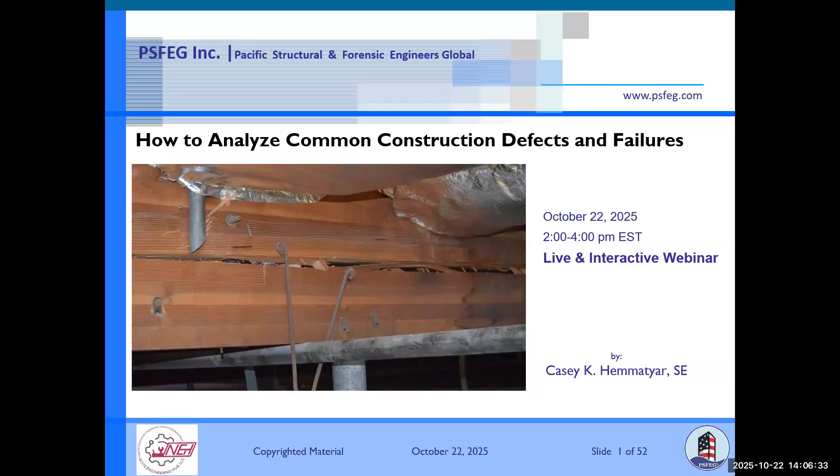I've been a licensed structural civil engineer for over 40 years. I have investigated tens of thousands of structures, from NASA to hospitals, universities, celebrity homes, and so forth throughout North America. I also perform as a forensic expert witness, and I have been designated as an expert witness in about 200 litigation matters throughout North America.

I provide these lectures as continuing education for engineers and architects, so I can assist my colleagues in improving their knowledge in this field, serving the communities in a more meaningful manner. That's it, okay, let's go to the next slide.

So I'm going to share with you my experience through this webinar with the following five topics: building's general structural engineering issues, foundation system issues, structural framing members, patent and latent construction defects, and exploring deficiencies and failures in the structures.

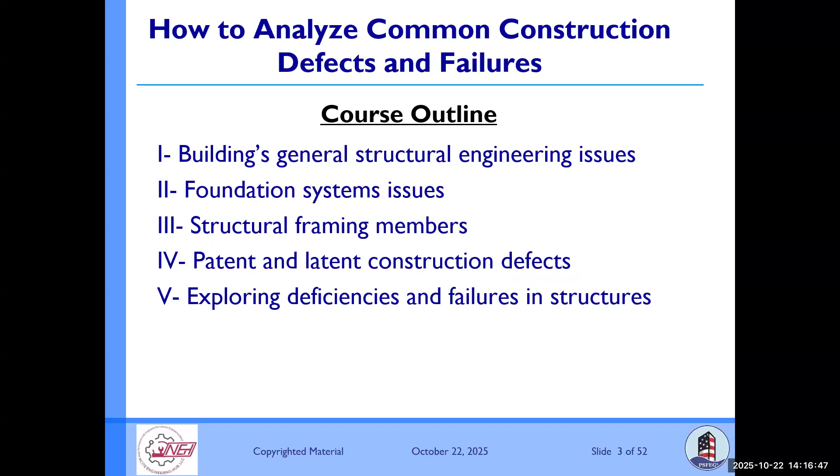Okay, so from the back in this third slide, we review this. Now we go to the foundation system issues. We're breaking down the overall structural issues: item number one is the foundation, and then we go to the superstructure or framing. So now we're going to review the foundation issues.

That comes down to four subcategories: foundation system failure, soil movement or displacement, geotechnical engineering evaluation, and structural engineering design.

I talked about the manometer survey as a non-destructive testing method on the previous slide. This assists us in the verification of the foundation. Obviously, it also assists in verifying the framing system on the upper levels, other than the first level on the foundation—but this slide is focusing on the foundation.

For those of us not very familiar with the manometer survey concept, I'll explain it briefly. Essentially, you bring an instrument to the building and check the topography of the floor. You find out which areas are low and which are high, and draw that on a plan—just like a topography map for a field—showing which areas are high, low, shifting, or tilting. That's what we call a manometer survey.

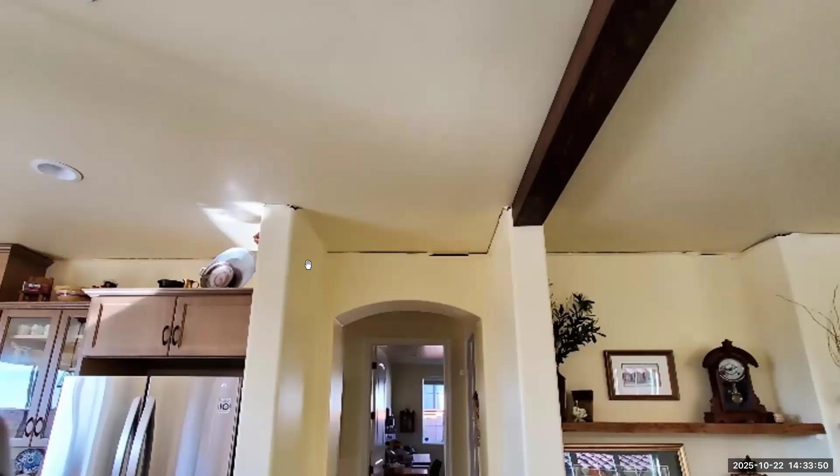You see what's going on here. If I can zoom in, you see the big separation, like a 1 inch separation here, and here, in the middle of the house. You see this separation. Why do we have this separation here? I explained to you why.

Because of the heave and expansion, it went up. Look what happened here. When the perimeter goes up, the truss bottom chord stays on the perimeter wall and is level, but the bottom keeps everything, all the walls in the same place. That's why you have these displacements in the middle. You see the gap.

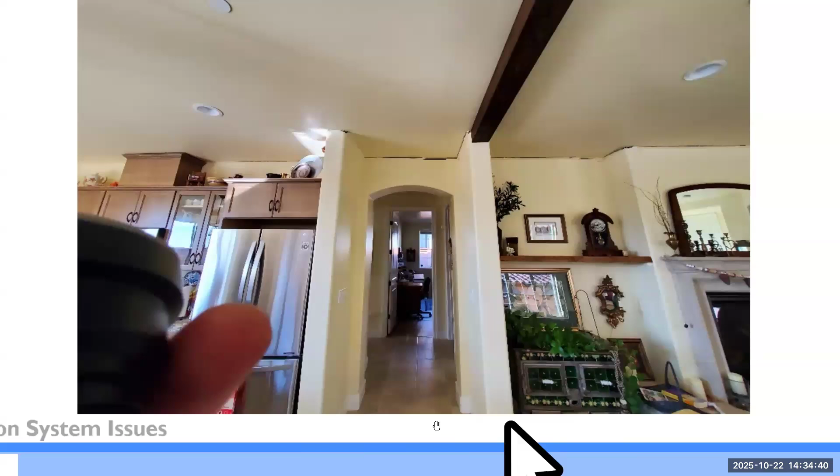So we go back here. This is that center. The walls are anchored to that and supported on the slab. They're down, but the roof trusses go up just because of the way it's displaced here. They're up because their ends went up. So that's how...

When you have improper treatment of the foundation, the soil, improper treatment of the soil, and not following the exact recommendation of the soil engineer, that's why this problem happened. If they did follow the exact recommendation of the geotechnical engineer, we would not have had this. Why? Because the soil below this was removed. They were importing gravel or sandy material, whatever was recommended by the geotechnical engineer, which would not experience volumetric changes because of the rain.

So let's go through the other photographs. These are some close-up pictures that we can see. More cracks here, more separation. And this right now is probably a $1.5 million home. It's not that the owners didn't pay a lot of money. They paid a lot of money, and these kinds of cracks are unacceptable.

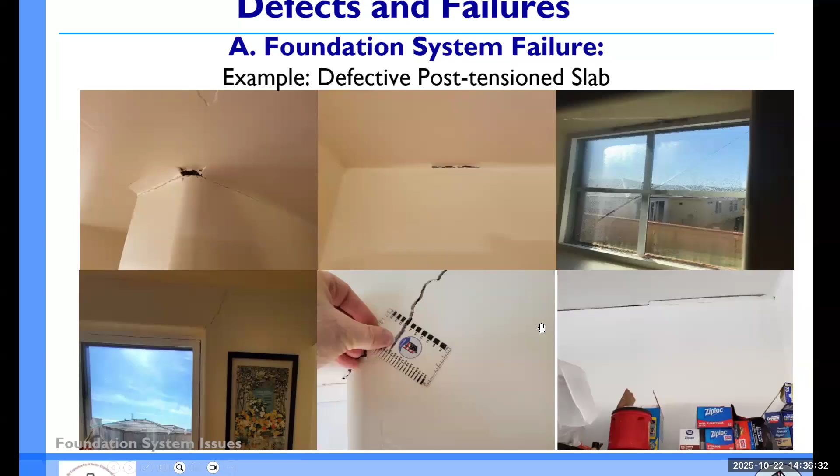This crack here that you can see is on the sliding door in the back of the house. It's a huge crack. You don't expect this in a 1-year-old home that cost $1 million when they bought it, with this kind of separation.

So we go to the next slide. I just shared with you some of these, and look here, the window at the back of the house - this glazing cracked because of the displacement, which forced the glazing to crack.

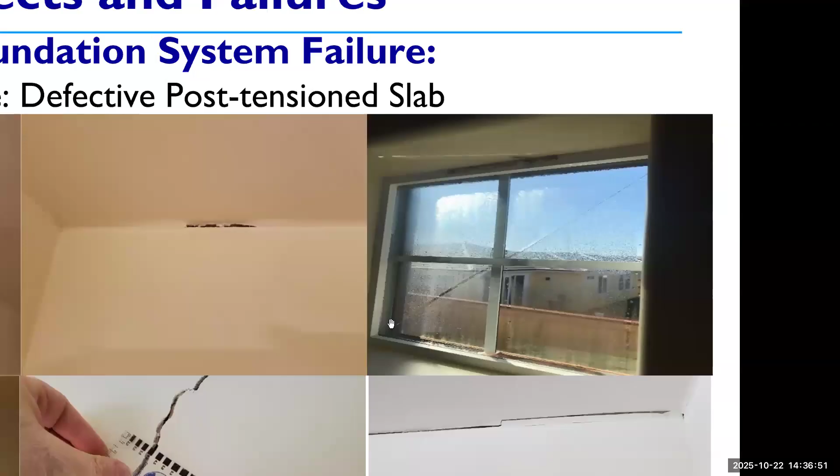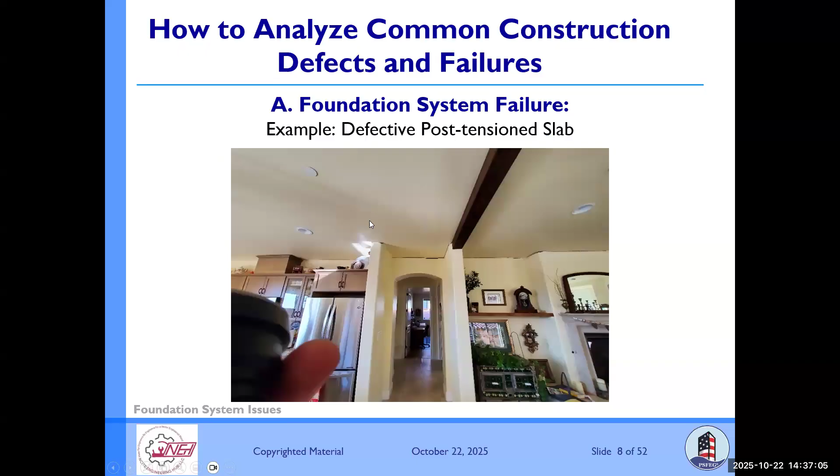Now, the next slide, we are talking about the soil movement. So far we were back in the slide, so you have some objective of what's going on. We were talking about foundation system failure. Now we're going to go to soil movement. So we go back to this slide, the soil movement that we're talking about.

Just going over this concept: when the soil exhibits volumetric changes, more specifically clay soils - the clay soil, generally, this is showing, when you have a new construction, once you have rain coming in, it impacts the perimeter of the building, not the center of the building. So the swelling occurs, or that heaving phenomena occurs, and pushes up the slabs upward.

The center of the slab stays the same, doesn't go down, it just stays in the same place. And you have this differential elevation that, in this case that we were doing, because we did floor elevation difference, it was like about 2 inches or inch and a half. And if you recall in the earlier slide, I mentioned about...

I mentioned about angular distortion. The angular distortion was way below acceptable level. I don't recall the exact dimensions and numbers, but I believe it was like 2 inches over a 20 foot span. If you calculate that, it's way below - I don't know off the top of my head, maybe 1/120, which versus 1/360 is way below.

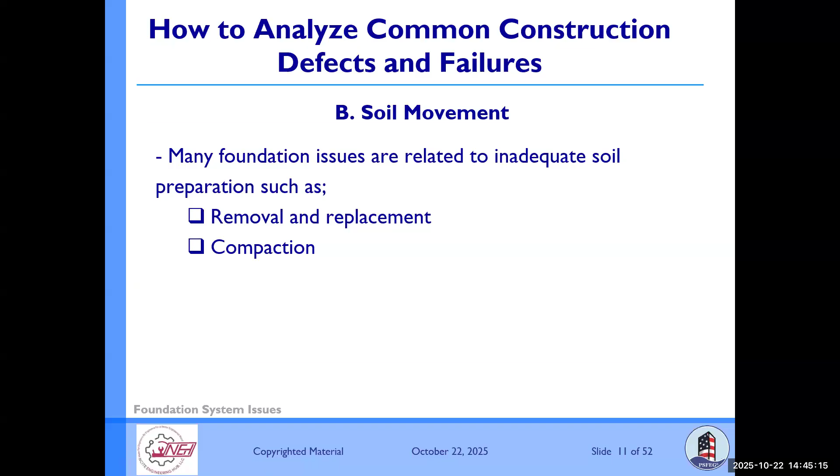So I just wanted to share with you that, thank God, the great majority of our engineers, their work, their reports, whether structural or geotechnical, are great. And if they're implemented, there's no problem. But there are some cases, unfortunately probably less than 5%, where the work product of the design engineer is not the best and can cause problems. Anyways, so going back to this, I just explained.

And now we go to geotechnical. If you recall, back in slide 5, we're on slide 13. Back in slide 5, I mentioned to you about these. This is slide 5. Now we're on the third item, geotechnical. Okay, now.

Geotechnical engineering evaluation, as I stated regarding that NASA scientist's home, is sometimes associated with foundation issues. The structural engineer does his job properly, but the geotechnical assumptions and recommendations were flawed, and that causes a problem. So in general, when the structure doesn't perform properly due to poor performance of the foundation, you can have three factors: either the geotechnical engineer was flawed, or the geotechnical engineer was fine but the structural engineer's design was flawed causing the foundation problems, or both engineers did their job properly but the general contractor didn't do the job properly and constructed it different than what was in the design.

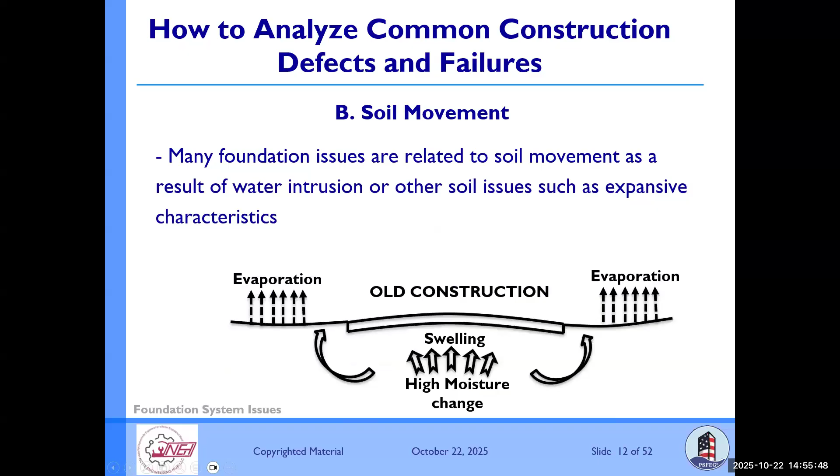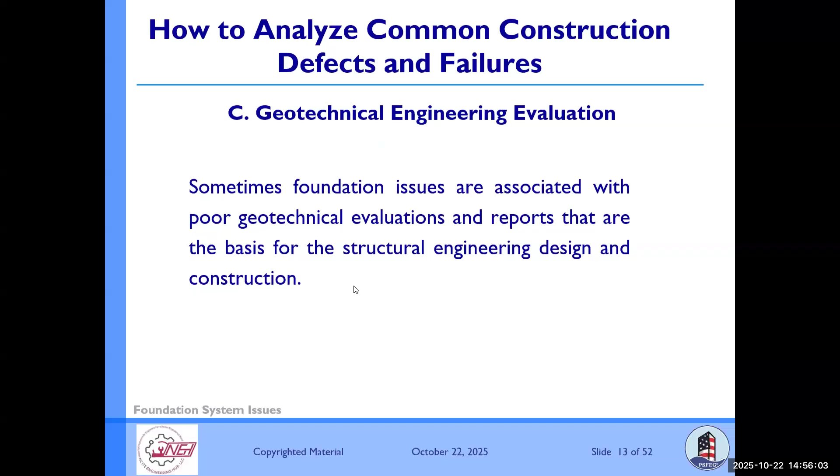Okay, now we were talking about this slide. Now we're continuing - let's go back. Structural engineering design, that was under the category - okay, under foundation system, A, B, C, D. Now we go back to the slide. Now we are at D, I explained that. Now we are on structural framing members. This should say 3, I apologize - it should say number 3 because number 2 was foundation, number 1 was general. So here the subcategories are: defective framing fabrication, defective roof diaphragm assembly, impact of adverse events such as fire, excessive heat on various types of structures.

Okay, so let me - we talked about general, we talked about foundation, and under foundation we went through soil, structural, geotechnical, everything. Now we are looking at the structural framing members - we're going to find out what can go wrong with them. Whether you have a one-story wood frame structure or a 10-story, 20-story concrete or steel structure, doesn't matter - they all have structural framing members. It can be wood, concrete, masonry, steel, post-tension, pre-stress, aluminum, whatever.

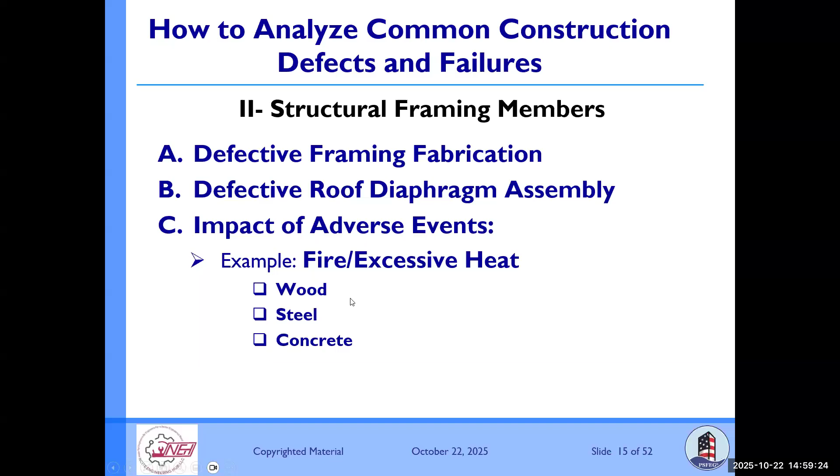Let's move on and I'll explain the first item, defective framing. Because I don't want to talk about things that are not real, I want to give you a case study, one of our own cases that our firm investigated. This was a California hospital, like a 5-story building. The reason I chose this case is that it's a hospital, and hospitals in California, as I explained earlier, are treated completely differently. Only a licensed structural engineer can design this, not a licensed PE - you have to be a licensed SE. The other feature about hospitals in California is that they don't go through the permit process like any other structure.

They don't go to the jurisdiction. There's a government entity in California, which used to be called OSHPD, but the name changed a couple of years ago. It's now called HCAI. This governmental organization has its own top-notch structural engineers, architects, mechanical and electrical design professionals, their own team, and they go through the permitting process.

They review the plans. In my own experience working with them, submitting a lot of plans throughout my career, if you design a regular residential, office, or commercial building, you submit it to the city, and usually within about 2 months after 1 or 2 cycles of plan check, you get your permit. With OSHPD or HCAI for a hospital, that takes on average, I think for a hospital or emergency clinic, at least a year, with at least 6 or 7 rounds easily.

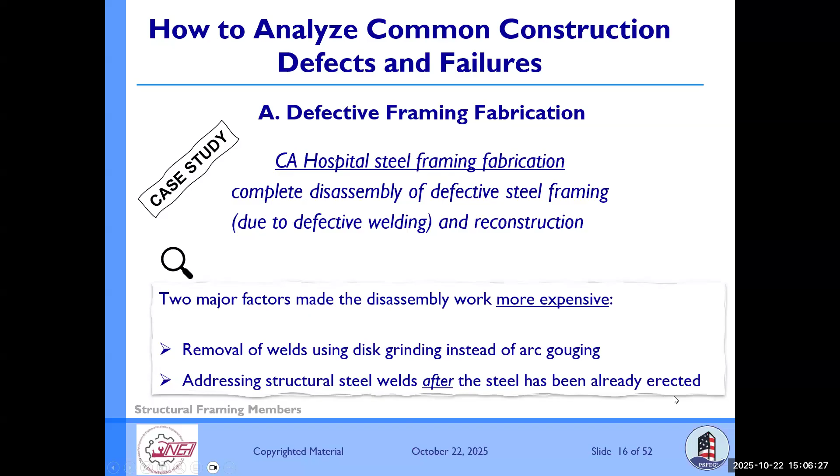Okay, so going a little deeper into this: the removal of welding used disc grinding instead of arc gouging. That was the procedure used to remove material in order to disassemble this, and doing the disc grinding to disassemble it made it more expensive. It also involved addressing the structural steel weld after the steel had already been erected.

Now we go to another example, because I mentioned to you about diaphragm assembly. In this case I'm talking about the roof assembly of wood. I picked up a case that is already settled, so legally I can talk about it. It's public information. I don't provide too much detail about the location, but this was in Washington State. I reside in California, but I travel throughout North America when my clients retain me.

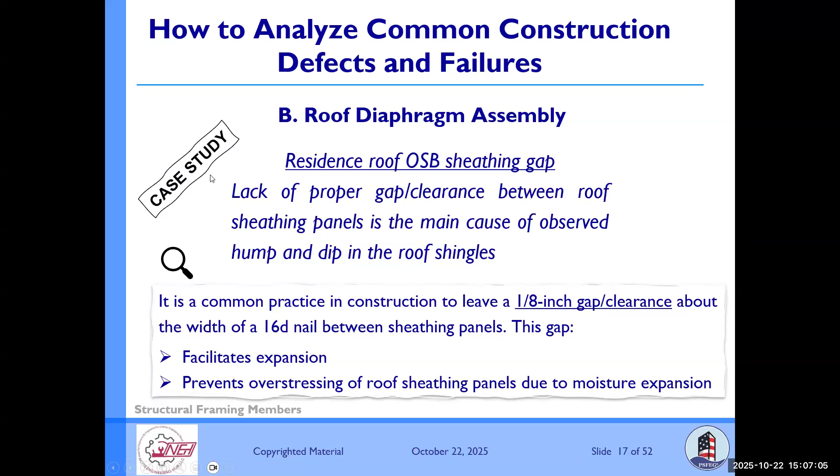This was in Washington State, and it was a dispute between the homeowner and a general contractor. It was a brand new home, the owner paid for it, on a large lot. Let me check the time—it's 12:07, so we have about 50 minutes to go.

So to cut the story short, he bought the land, the general contractor came in and built a beautiful house, about 4,000 square feet. He was happy with his family, everybody was happy. Then after a few months, some guests came and made him very disappointed because they told him, 'Hey, your roof is wavy.' His roof was not flat. He said, 'No, I've lived here six months, everything is okay.' Then the guest said, 'No, bring an independent general contractor to check.' So they brought in a general contractor, and it was wavy, about an inch or so.

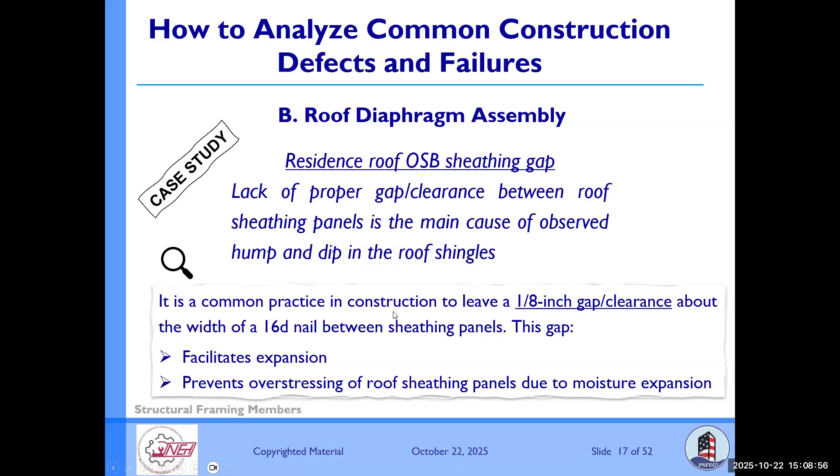So what happened? Why do you get a wavy roof? In a wood frame construction, whenever they put the OSB roof sheathing or plywood sheathing next to each other, they have to have a 1/8 inch gap between them. If they don't, then because of expansion and contraction due to changing moisture content, you always get these wavy roofs. I've seen at least a few dozen of these cases all over the place, whether in dry states like Southern California or in Washington State.

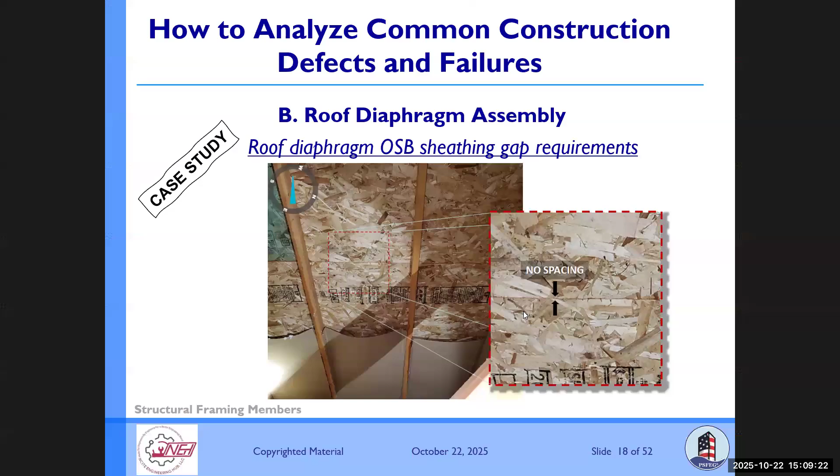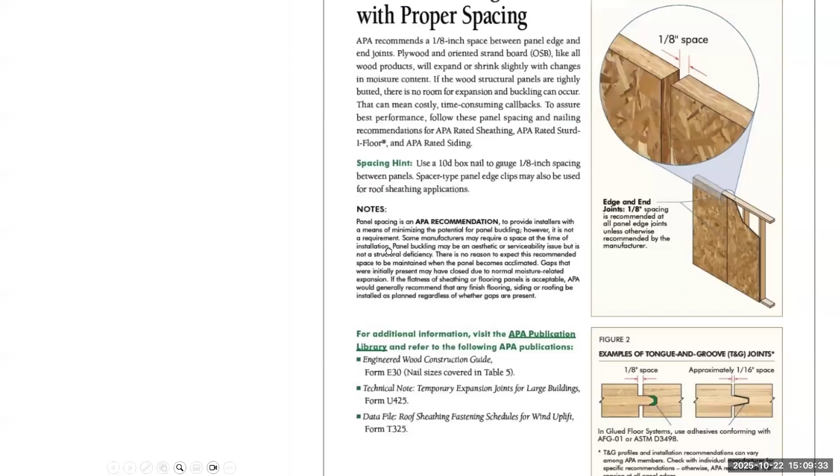So let's take a look. This is the picture—I went into the attic and took these pictures myself to find out what's going on. This is OSB against OSB, butted right against each other. There's no gap; it should be a gap. As illustrated here, no gap. So we determined that was the reason. There was a guideline from the American Plywood Association that I put here, which states you must leave this gap, otherwise you encounter problems.

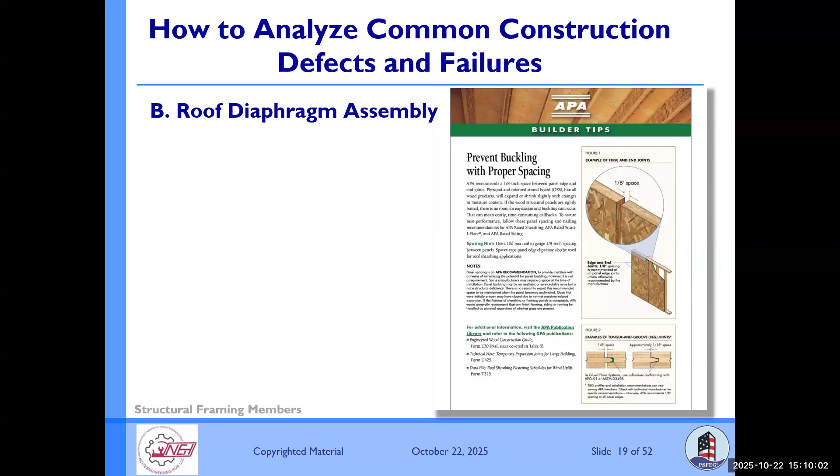Unfortunately, these general contractors bring in the cheapest subcontractors, and the cheapest contractors don't necessarily have the knowledge of this. They just push this onto undocumented subcontractors to install, and they think it just has to be tight—and that's the problem.

Okay, impact of adverse events such as excessive fire on wood. Why do I talk about this here? Because it's not necessarily a defect, but a failure—the title of this presentation is defect and failure. So we talked about some defects; now we're going to talk about some failures that occur. These failures are not necessarily a result of any shortcoming from a design professional or construction professional—this is just nature, and it happens. We go into an investigation and just have to have sufficient knowledge to evaluate this.

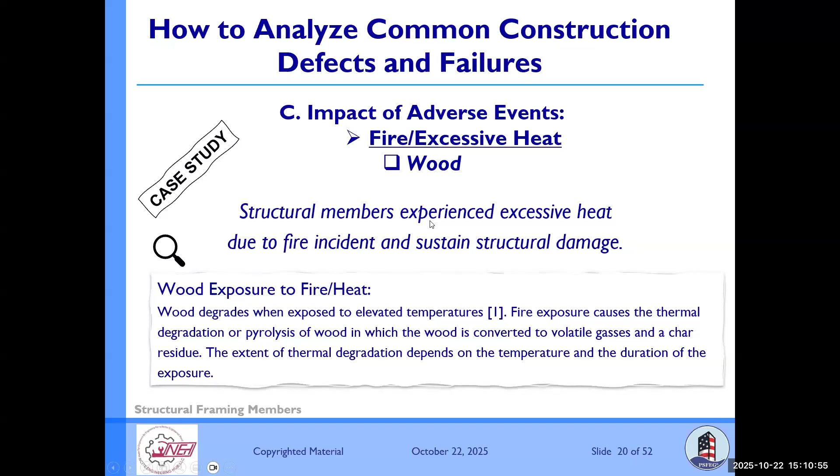Okay, now when you have wood and you have fire—this is a case study also. I'm talking about a real case study so you have a real understanding of what happens in the case of fire in a wood structure.

Wood generally—when you're hired by the insurance company versus when you're hired by the owner—our report should be consistent. We should not say the wood is okay when hired by the insurance company, and then say the wood is not okay when hired by the owner. We have to have objective criteria: why wood is okay, why wood is not acceptable, why it is compromised. There are scientific criteria to evaluate them, and I put the references here at the end of the slide—you'll see the references.

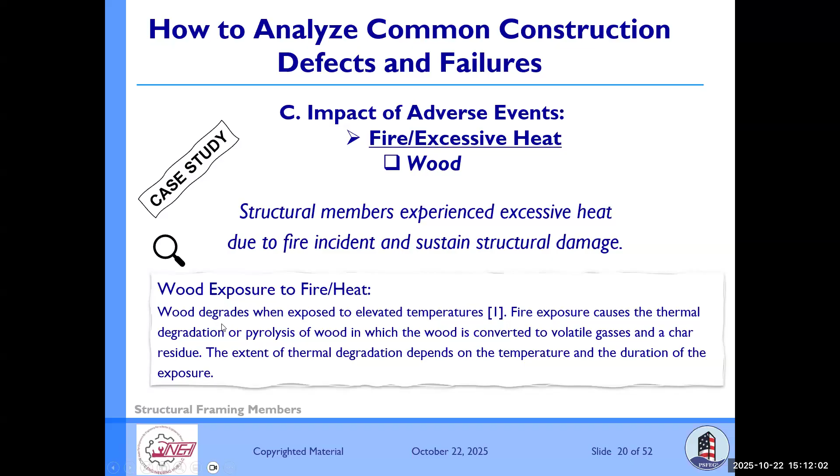So wood degrades once it's exposed to high temperatures. Let's go through those temperatures. As long as it's below 212°F, the boiling point, the mechanical properties of the wood can be impacted, but it's reversible—they can go back to normal. But once we go above 150°F, if it's sustained, and it also goes above 212°F, there might be problems, depending on the duration. Prolonged exposure over 150°F, but if it's more than 212°F, obviously it's going to be more serious. Let's take a look.

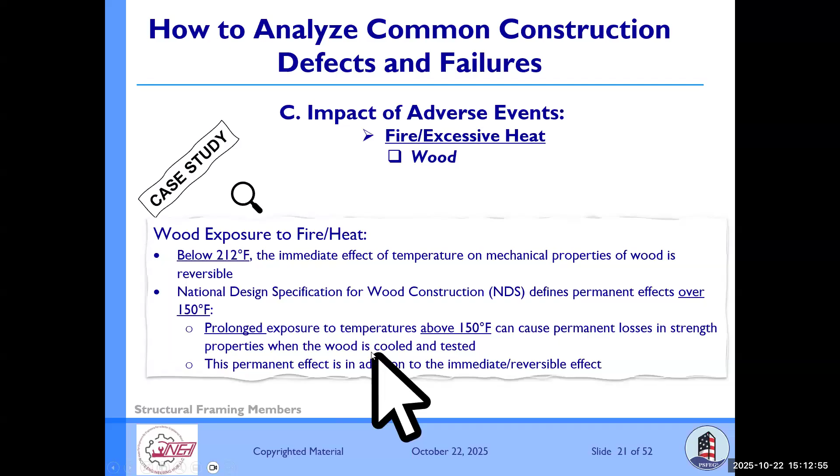Okay, so this case study is a single family one-story home in Southern California, Pasadena area, and this was as a result of a fire.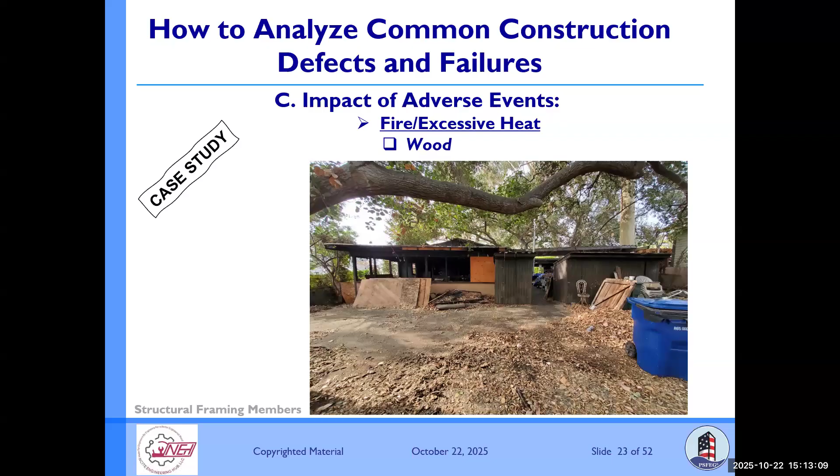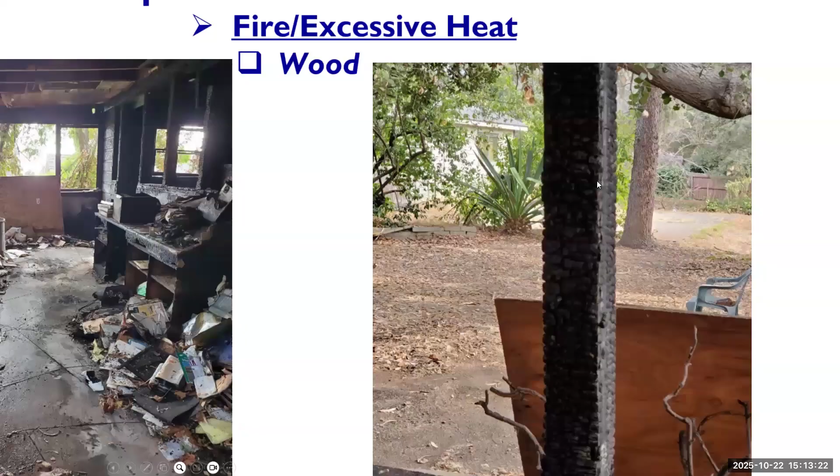Okay, now you see these 6x6 posts, completely compromised. You see what's going on. You can't rely on this structurally; the integrity is completely compromised. Whether you're hired by insurance or hired by the owner, there's no way you can say this is okay.

But you might laugh. I've seen some engineers retained by insurance carriers say, oh, just clean it up and put some 2x4 around it and we'll be okay. But that is completely unacceptable and unprofessional. And I've seen worse than those when they're hired by the insurance company.

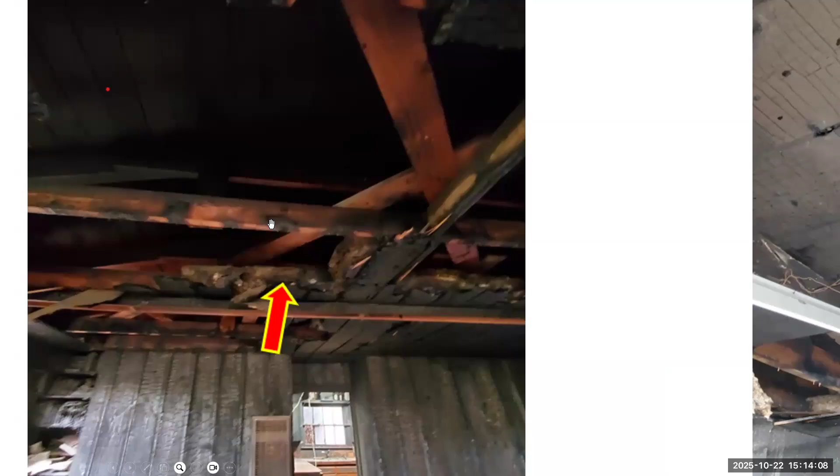Okay, so here you see the evidence of severe fire and severe temperature on the structural members. These are like ceiling joists here.

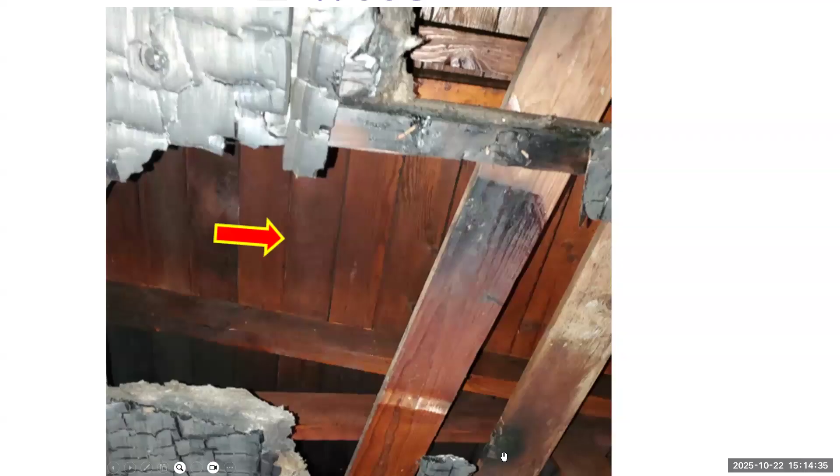Okay, and I explained to you what is acceptable, what is not acceptable. Not every wood that is impacted by heat and fire has lost its structural integrity, but there are objective criteria to check. See the discoloration here.

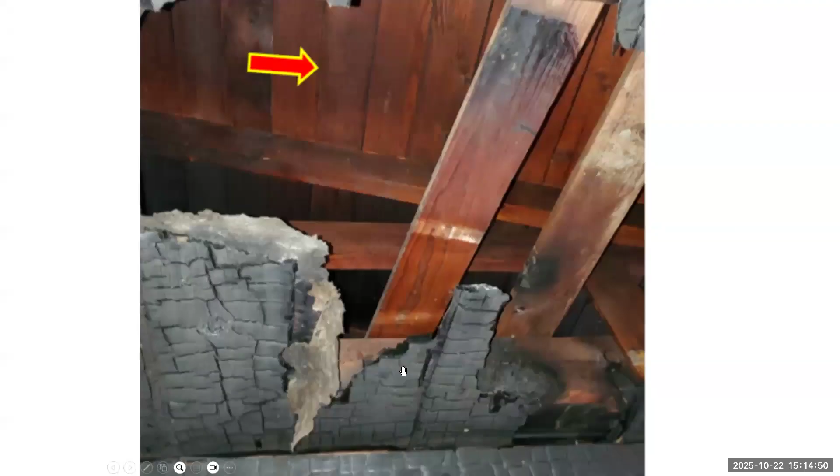Okay, so let me tell you some criteria how to. Obviously, these you can't use this anymore, right?

Now, when you go into a structure and you want to know if these structural framing were acceptable or not, you have to look at some clues as to what temperature this structure experienced inside.

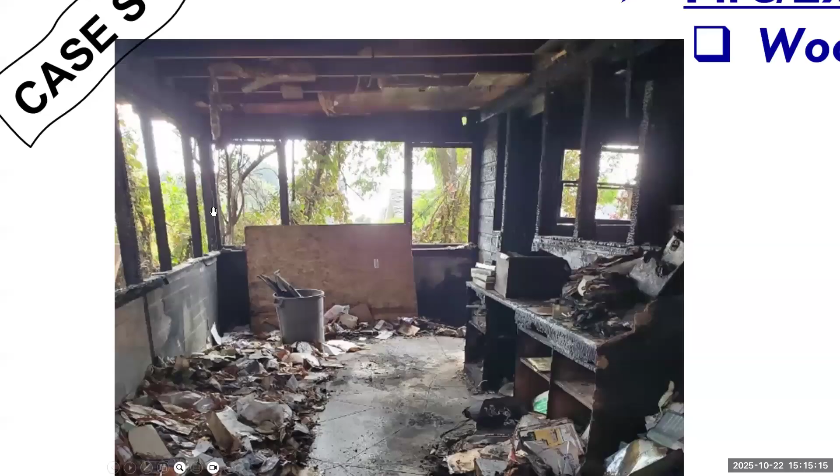Okay, you see here, all the glazings are gone. They all broke, they shattered. What does this tell you?

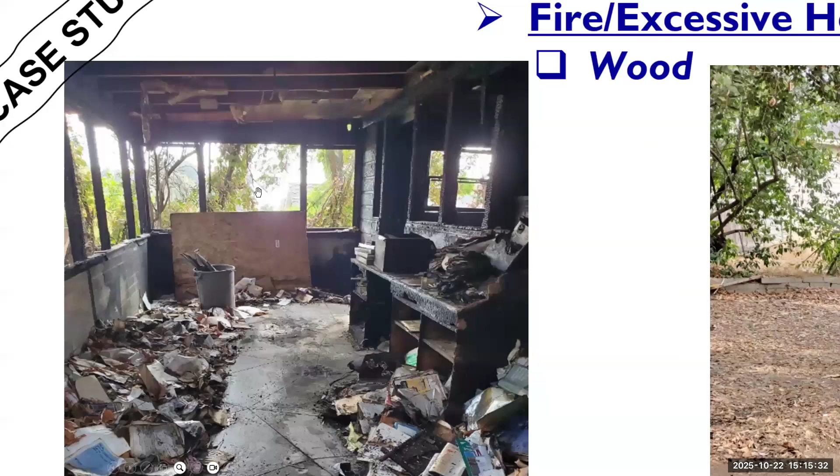Look at the references that I provide at the end of this presentation, and you will see that glazing starts cracking above something about 350 degrees Fahrenheit. So this tells you that the temperature inside this structure, until it was extinguished completely by firefighter efforts, sustained that kind of level of degree, like above 300, for a good period of time.

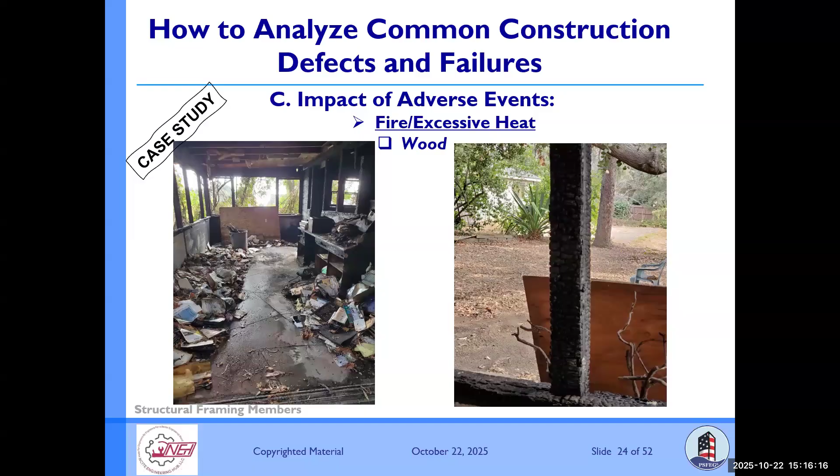So that's evidence as to whether the wood's structural mechanical properties were compromised or not. If this glazing were okay, then that would have been a different story. We could do a little bit more investigation to see if we can utilize the existing framing. But in this case, all glazing were gone. There's no way that these...

Okay, let's go to the next slide, which is on a concrete structure. This is another real case study, and we were retained by the Department of Recreation in California. It was a wildfire in Malibu, on the trails. We had to take a look at the bridge, a steel wide-flange, long span structure.

It was engineered by a licensed structural engineer and everything, but it had three components: it had wood railing, wood planks, and the steel main members, and it had a concrete abutment. We had to find out if we could certify this or not.

So I explained to you about the structural integrity of the mechanical properties of wood. Same thing here with concrete: once it goes above 212 degrees Fahrenheit, these are all related to steam. Once the steam comes with pressure, it can impact the way the material properties perform.

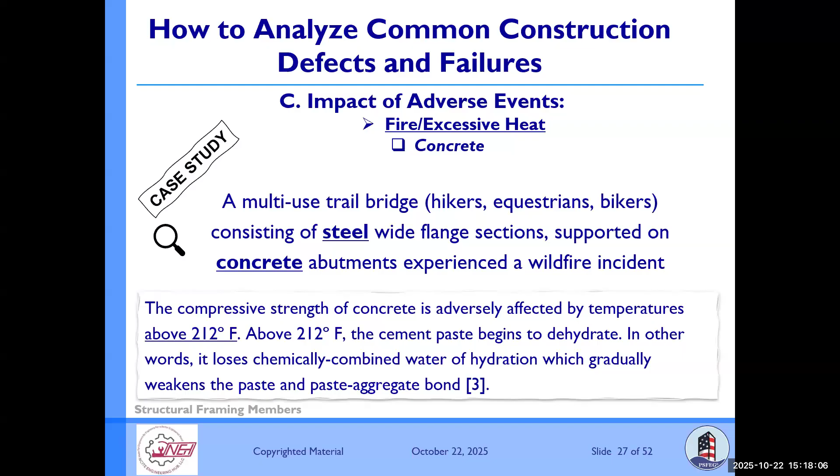So once it goes above 212, the cement paste begins to dehydrate and loses chemically combined water of hydration, which gradually weakens the paste. Again, reference number 3 is here, you can look it up. It doesn't necessarily mean that once you experience 200 degrees it's compromised; it depends on the duration and several other factors that we're going to go through together.

So we need to do a visual observation. In this case, we had our concrete abutment, and it appeared that the abutments were not compromised.

Why? We did a visual observation of the surrounding area of the bridge, like the tree vegetation, and we determined that it is obvious the fire could not generate an environment above 212 degrees for a long period of time. Maybe it was for a short time, a few minutes or a few seconds, but it was not that extensive. That's based on my judgment, my experience, my training.

No discoloration of concrete. We have some photographs to share with you. Usually when you have excessive heat, the concrete gets discolored - it can go gray, from gray or natural gray, to black, to pink. It will be obvious. I've seen those myself in fire events. So we have to check for discoloration.

We check for that, and then there's a rebound hammer or a Schmidt hammer. There are several types of these on Amazon. You can buy one for $50 - they come from foreign countries, Southeast Asia countries. I don't want to name anything, but if you want the real one, it's made in Switzerland. It costs about $1,500 to $2,000, and they're super accurate.

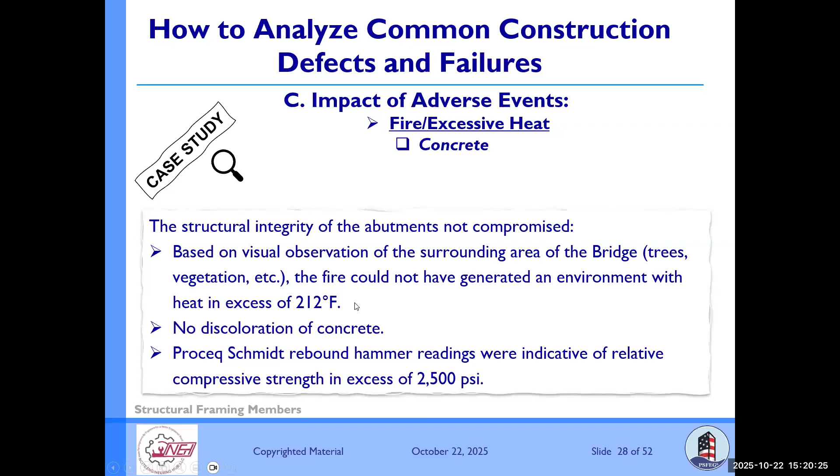In this case, we established that they were way over 2,500 PSI. If I was suspicious, I would ask for a core test, send it to the laboratory to do an actual test.

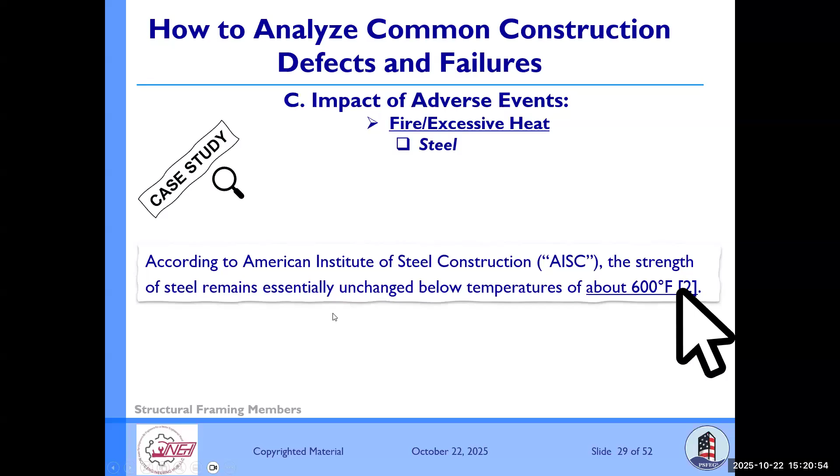Then the next component on this bridge was the steel. We had a lot of steel, several steel components, wide flange and so forth. According to AISC publication, as long as you are below 600 Fahrenheit, your steel is okay and not compromised - that's referenced at the end of this presentation. So we did the...

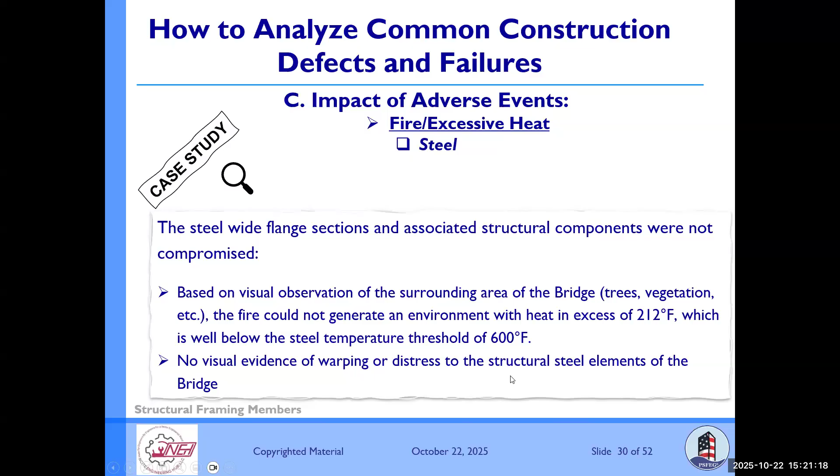Visual observation again, based on the surrounding area, we established that it was not anywhere near 600. So there was no evidence of warping or distress to the structural steel elements.

Now we're looking at some pictures. This photograph was taken by us with our drone. I have a license with the Federal Aviation Administration, and I fly the drone. My associate, who's a junior structural engineer, is my son. I'm proud of him. He assists me on these site inspections.

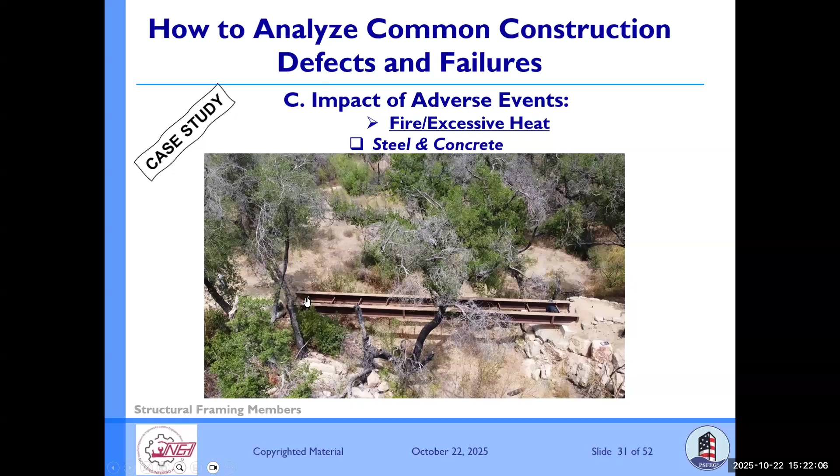So from this side of the creek, which is the right-hand side, to the left-hand side of the creek, this bridge spans. I believe there were W24s, and you can see there's nothing left of the railing, nothing left of the decking, just the steel and the concrete. You see the concrete abutment here. So that gives you...

The overview. Now there are more photographs that are a little more clear. This photograph shows you the steel. This is our client checking something, or maybe my son - I'm not too sure. So this is the wide flange secured on the abutment over the creek.

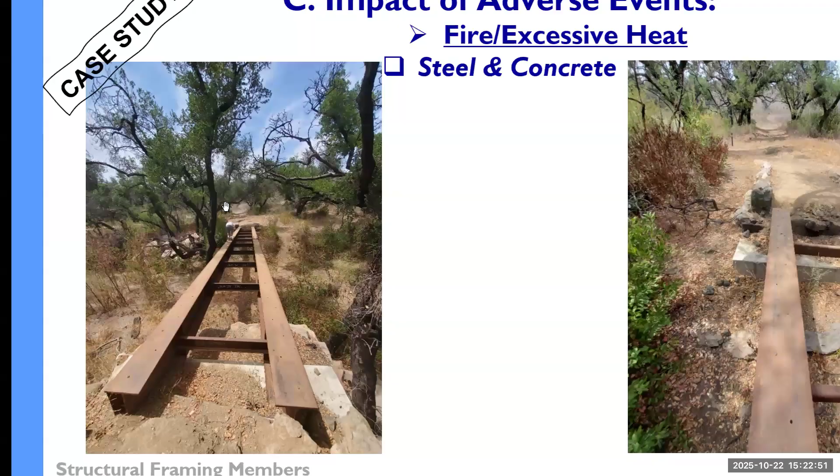Let me explain. We went there, I think, shortly after the fire - we didn't go there like several years later, it was like a month. Look at this, look at these green leaves and everything. This tells you that if the temperature was really excessive, you would not have had these green leaves here, right? This evidence suggests the temperature would have been far less than 600, and probably below...

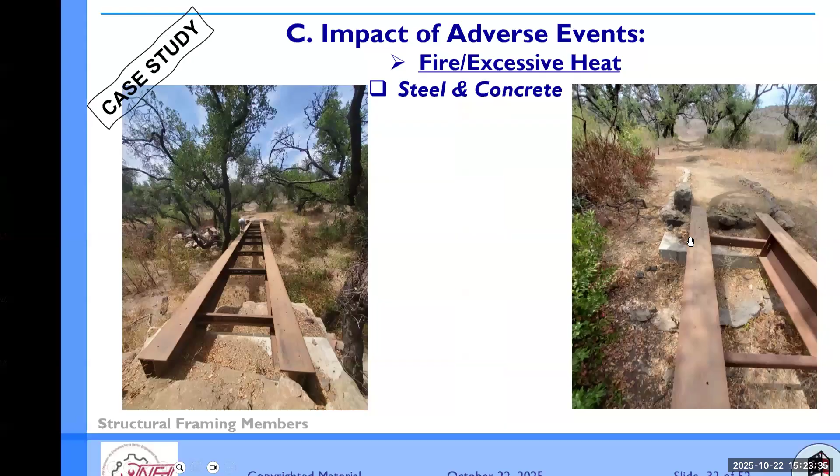Very, very likely it was below 212 degrees. I'm confident that was the case based on my 40-plus years of experience and training. This picture also shows that - you see, I don't see any evidence of discoloration on the concrete, any warping, any distortion on the steel. The same thing here.

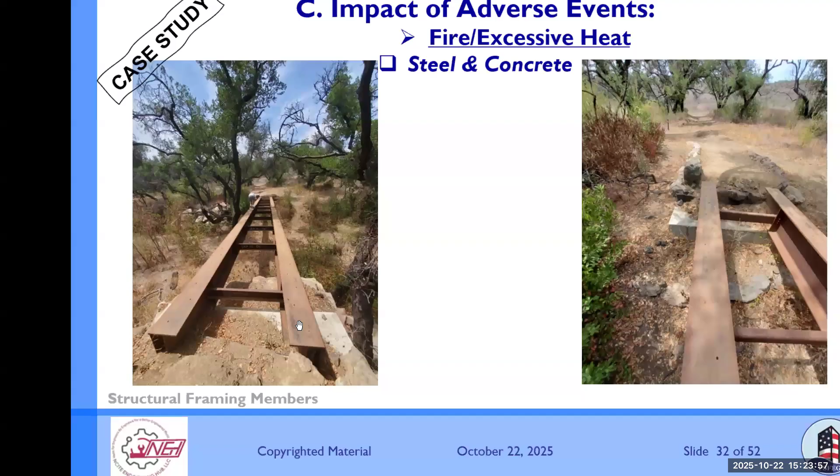And the concrete is massive. There's probably 5 psi force on these concrete abutments - they're not sensitive, like a 2000, 3000 psi stress on them.

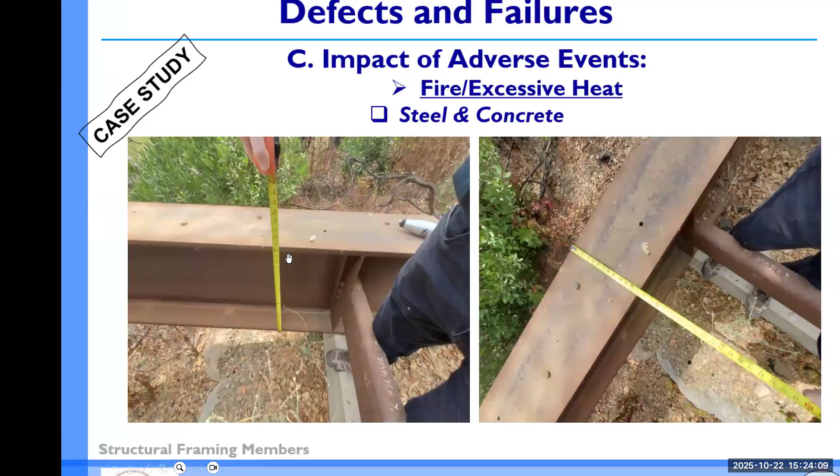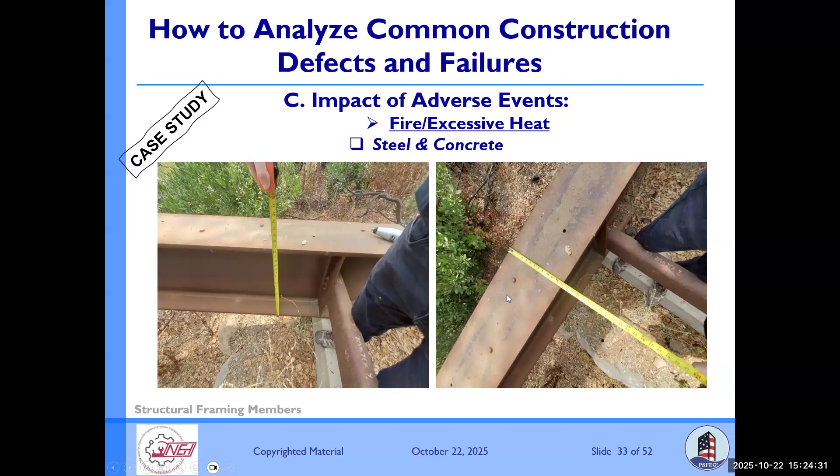Then here, as you can see, is a 24-inch wide flange. Oh, by the way, this is the Schmidt hammer - I'll show you in a few seconds. I'm measuring the wide flange sections, making sure the structural as-built drawing I received matches - that they followed the structural engineer's recommendation and plans.

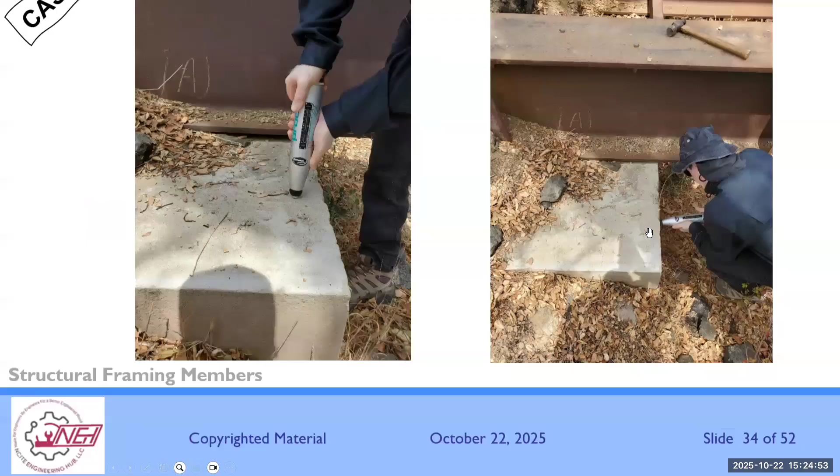This is the Schmidt hammer that I mentioned to you, and this is the concrete. As you can see, there's no pink or black or anything. I checked them at different values - this is me, in this direction, vertical direction, checking the relative strengths.

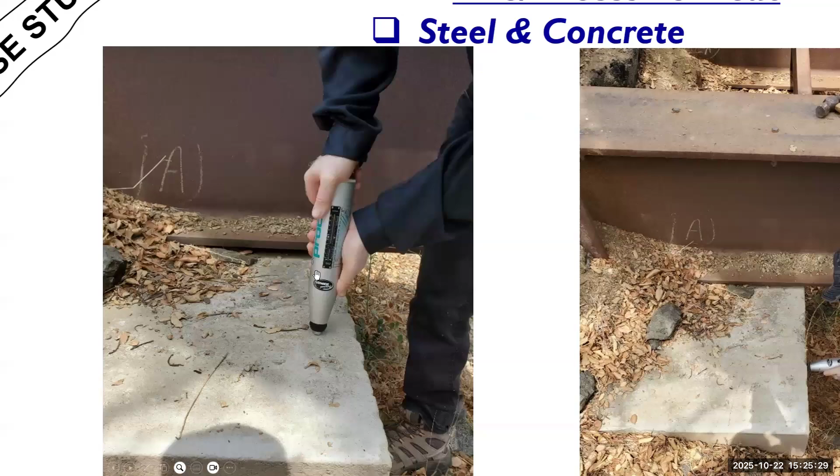You have to be careful. If you do this and find inconsistency, like over 10% or 15%, then you have to get core testing sent to a laboratory. But once you do it and everything is consistent, within 5 to 10%, then you know the concrete has not been compromised, and the relative strength it tells you - like 3000 or 4000 psi - isn't super accurate, but it's not very off either. It's relatively reliable. So if it shows you 4000 psi and you send it to the laboratory, it's probably going to be in the 20 to 25% range of variation.

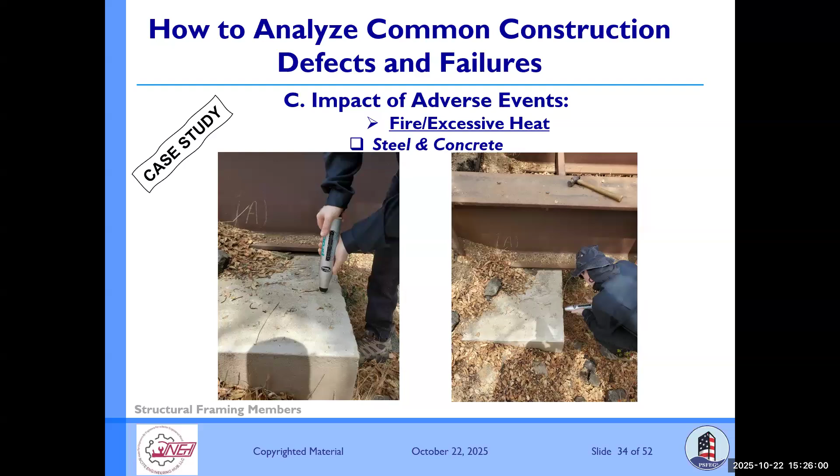It's not going to be like 90% variation. So if you read 4000 psi, it's well over 2500 psi recommended requirement. There are graphs you have to go through in order to interpret them, depending on the direction of application of the Schmidt hammer.

Again, on slide 3 that we had, the fourth item was patent versus latent construction defects. We have about 30 minutes, so I'll try to go through these 16 more slides so we can complete this.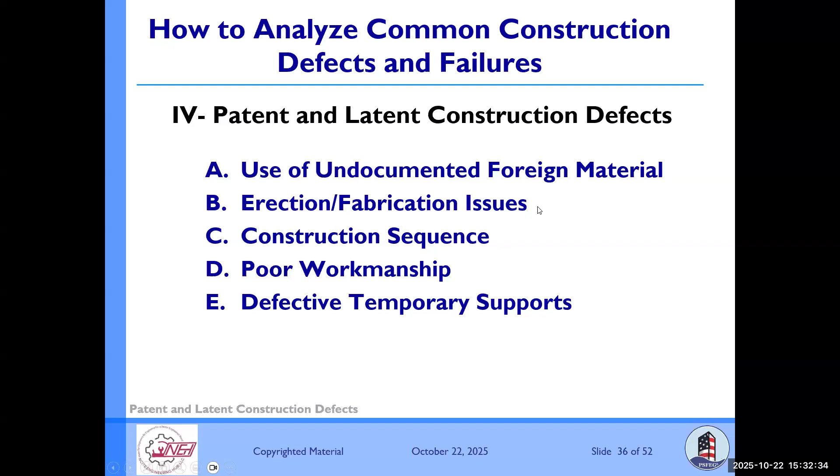So we are different - we are design professionals, we need to be extremely careful. If a general contractor wants to go too cheap with extremely cheap and suspicious material, don't let them do that. Don't approve that. Okay, construction sequence, next item.

That can determine some of the impact of some of the issues. I'll explain that to you in a few moments if we have enough time. Poor workmanship doesn't need to be explained.

Defective temporary support. Temporary supports, whether you're temporarily supporting the framing or temporarily supporting an excavation, usually they have to be engineered. Generally, they have to be engineered. Whether an excavation is supported or some framing is supported, it has to be engineered. They can't just put a 2x4 or something and say, oh, this is good. No, there are certain regulations, certain building codes that apply to these temporary supports, whether it's less than 180 days and so forth.

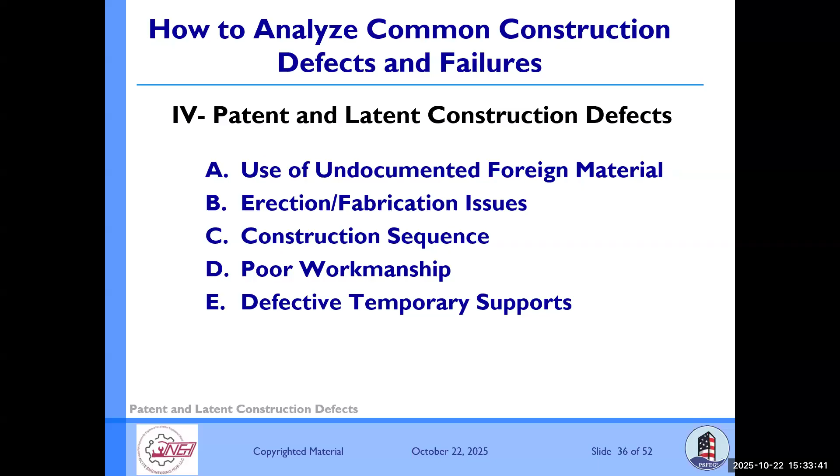Removal of wall finishes does not constitute destructive testing, even though it's commonly seen that way. Unfortunately, everybody sees it that way. Even a lot of structural engineers who are not specialized in forensic investigations think that, and as soon as you start doing this during litigation, everybody panics. Oh, you did destructive testing, you should have gotten our permission first. No, it's just a removal to examine what's behind the framing.

Core sampling, yes, that's destructive testing. What is the definition of destructive testing? The term itself explains it. It means you take a piece of sample from a structure, whether it's concrete, steel, or rebar, you take a piece out. Then you take that to the laboratory and test that component to the point of destruction. It has to be destructed in order to provide the mechanical properties. It has to be destructed under the test, otherwise you can't obtain those values.

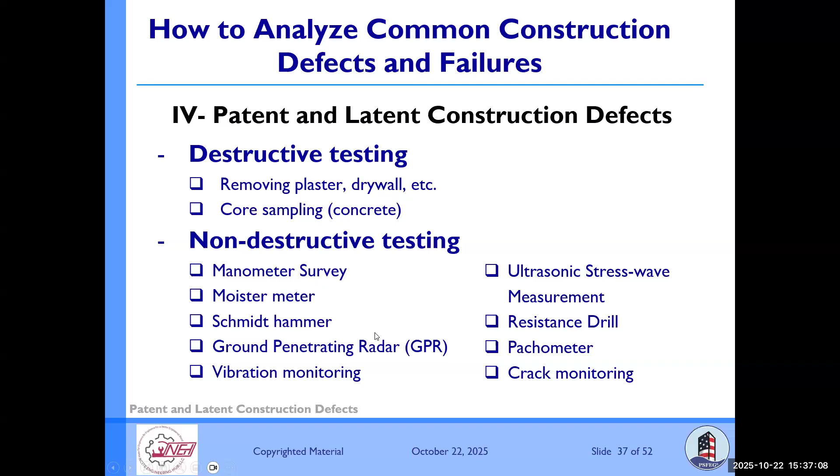And obviously, whenever these are done, if it's litigation, all parties have to be present. If it's not litigation, just an investigation for insurance or for a private client, no, not all parties need to be present. Usually it's okay, you do it yourself.

Going to patent versus latent defects, cracks in concrete generally come from two sources: either shrinkage or structural cracks. If they're shrinkage cracks, there's no concern, okay? But if they're structural cracks, there are issues. You need to be able to distinguish which crack is shrinkage and which is not.

Once it goes beyond a shrinkage crack, like for example, you have a 1/4 inch width crack, it doesn't matter what the general contractor tells you, that it's not a problem. No, once it goes beyond a certain width, it's structural and has to be investigated. It doesn't necessarily mean it's unsafe, but it has to be investigated by a licensed structural engineer to determine whether the structural integrity was compromised or not.